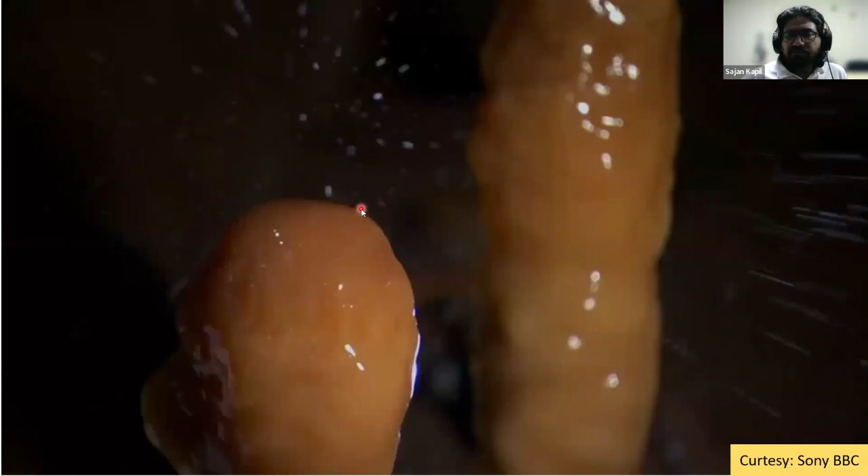You see this bird here... something is happening. Okay, so in this particular video you will see the advantage and disadvantage of this technology just in a single video.

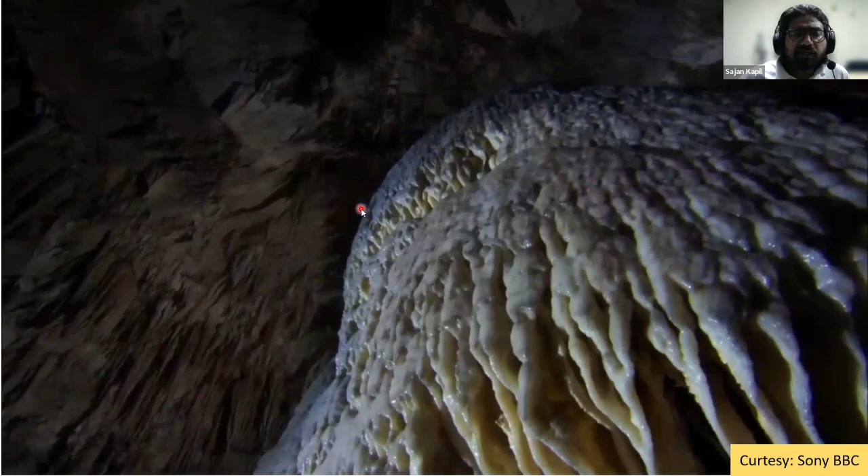These are limestone caves. If you've visited a cave—there are a few in Meghalaya as well, if you get time you should come and visit. These water drops, when they leave the roof of the cave, leave material behind, one on top of the roof and one on the bottom. These two materials keep growing, and finally they meet, creating column-like structures like you see here.

This was not done by cutting the material. These structures were not created by the flow of water cutting and creating it. No, they were created by additive manufacturing, by depositing layer by layer. And the growth rate of these columns is like just a few microns in a year.

Maybe it's slow, but can you really fabricate it by any other method? By cutting, can you do that? No, it's very difficult.

But of course it takes time. There are advantages and disadvantages, so we have to choose this technology wisely. I say this again, many times before as well - we should not just look at this technology, fall in love, and utilize it for something. That's not going to help. We have to choose it where it's really required, first understand the whole process, and then choose the appropriate one.

So, 3D printing - many names are there, right? Many keywords: 3D printing, layer manufacturing, additive manufacturing, solid freeform fabrication, digital manufacturing, rapid prototyping - all are the same. Each and every name is given for a particular reason. It's not like suddenly somebody came and said, let's call it digital manufacturing. No, there is a reason why it is called digital manufacturing, why it is called solid freeform fabrication, why it is called rapid prototyping, rapid tooling, rapid manufacturing.

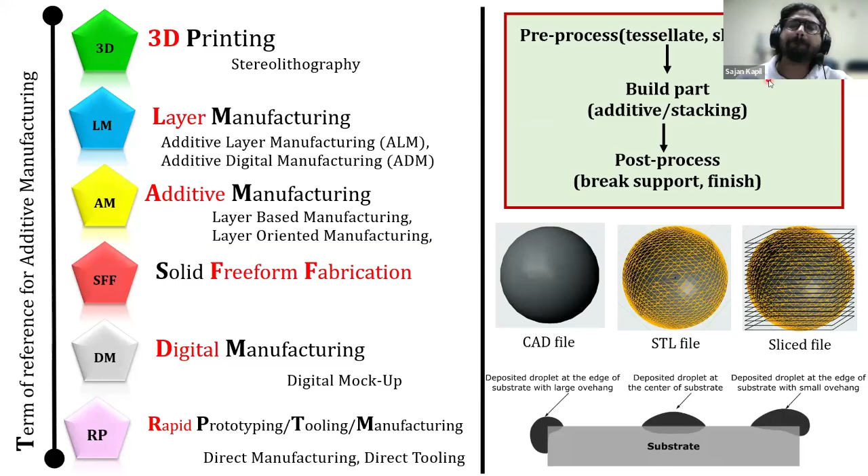What varies - there are multiple ways of doing it - is how to add the layer. Either I should join it by glue, or join it by melting, or some other way. So the interesting part is how to stack these layers together, and that is defined by ASTM by simply 7 methods. You can join these parts, and layers can be joined in 7 different ways.

Either they are photopolymerized, or you inject the material just like your 2D printer - that deposits drops of material on paper. Similarly, you keep doing it and grow in the Z direction. Or you are injecting binder - you know this technology where we spread a layer of powder, and then the binder falls from the top. Either the binder or the ink coming from top has a binding agent, or the material itself has a binding agent.

That's a different story - it's like you spread a layer of, say, cement, and then put a drop of water; wherever the water falls, it hardens. Material extrusion - yes, you can do material extrusion as well. Sheet lamination, in which you join sheets together. So material extrusion, that's the FDM process - of course concrete printing also falls into this category.

Sheet lamination you might not have seen, I believe, but I'll show you - we have one sheet lamination setup also now. We use metal sheets joined together by FSW, but of course you can join even papers together and create structures.

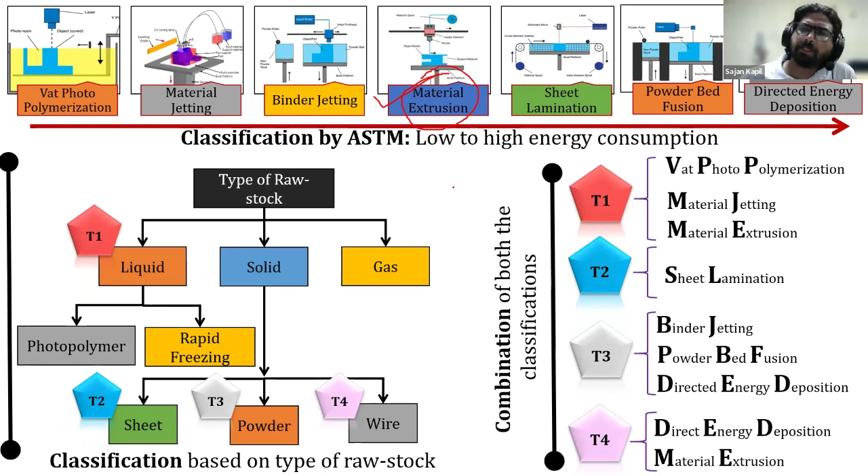And then CP Paul's might have talked about the laser-based DED system - his process falls under this category, and so on. I think you can now map it easily.

So under each of these categories there are more than 10 to 50 types nowadays. In total, we can name more than 50 different types of additive manufacturing processes, but they are nicely covered by ASTM. You can also classify them in a different manner, like what raw material is being used - liquid, solid, or gas.

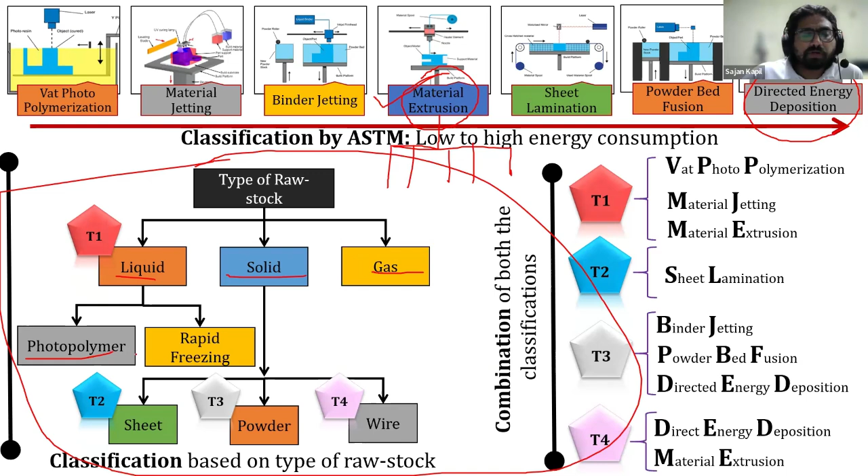If it is liquid, how do you join liquid? Either you photopolymerize it or freeze it, if it is wax or water. If it is solid, it could be sheet, powder, or wire. Or gas - I haven't seen anything where two gases come together and make a solid. No, that may be in the future, and you can think about it.

I tagged it like T1, T2, T3, and I'm categorizing it with ASTM here. You see that multiple categories are further falling into groups. So the point is, whatever you are developing, you should always map it with that. That helps you when writing papers, because nowadays many journals clearly say to bring the conventional, standard way of naming your additive manufacturing process.

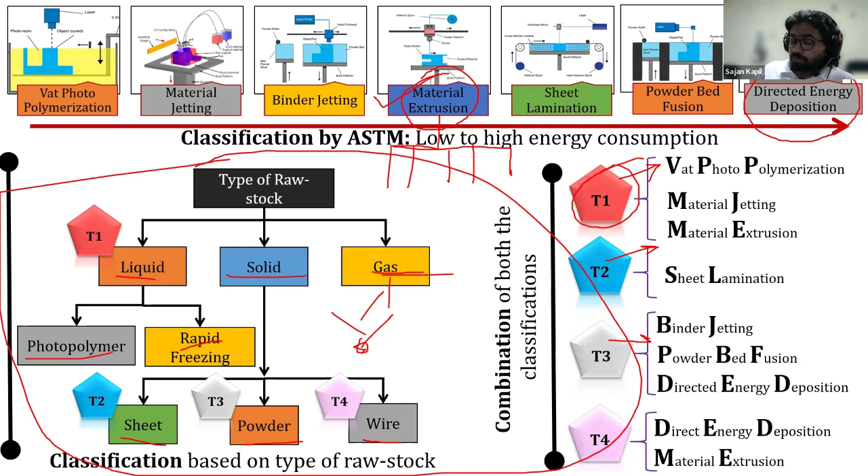FDM - many good journals do not really accept that term, because it's for a particular machine, while the technology should be called material extrusion, or more particularly, fused filament fabrication.

So these are the different types of 3D printing processes. This is vat photopolymerization. This is sintering, SLS, the powder bed fusion. Material extrusion, direct energy deposition using powder. This is wire arc additive manufacturing using welding guns.

So I'll talk about this particular one a bit. Though let me tell you, it's not at all new. Somebody says he invented this - not really, it's the oldest 3D printing process. See the patent, it was filed in 1920, where it is written that we are claiming a method of making decorative articles.

They say take a welding gun and keep depositing the material in your hand, and you will make decorative articles. They said decorative because they might have believed that at that time there wasn't enough strength, and the hand movement may not give perfect shapes. So it's okay, but the hand has been replaced by the robotic arm now, and the weldings are a bit more sophisticated. That's all. And of course you have software which can move this robotic arm in a particular path. That's it - otherwise this is not really a new technology.

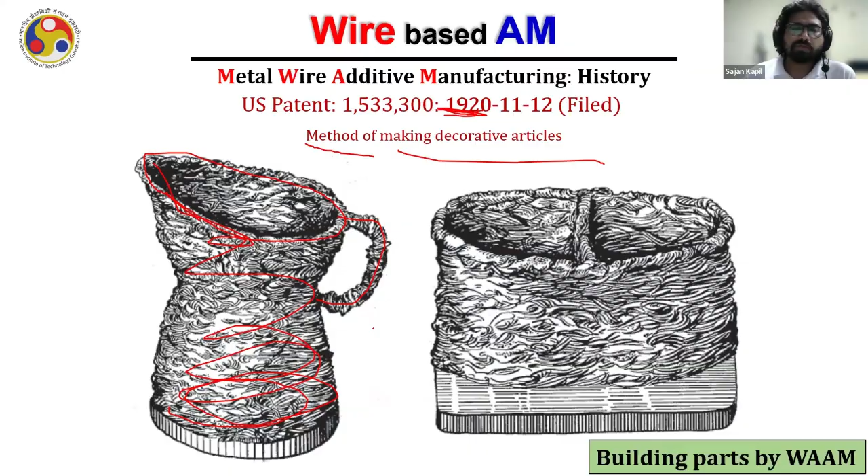But I'm going to talk about it. Before somebody questions - I know some of you may be metallurgists - I always believe this is an important question.

Who do you think is a material expert, I mean a 3D printing expert - how do we know? How can we say that this guy is a 3D printing researcher, or this guy's research area is additive manufacturing? You might have met many people, and if you see their background, either they have a PhD in finite element method and do simulation for DED or other processes, or their PhD is in material characterization, and then they do characterization for additive manufacturing also.

There are very few you will find who can talk about all seven processes independently - about the machine, how it works, about the software that goes into it - irrespective of being an expert in materials or an expert in something else. So they may have a doubt, of course, that what you are telling may not work. I mean, strength may not be good, roughness may not be good - many issues you can raise.

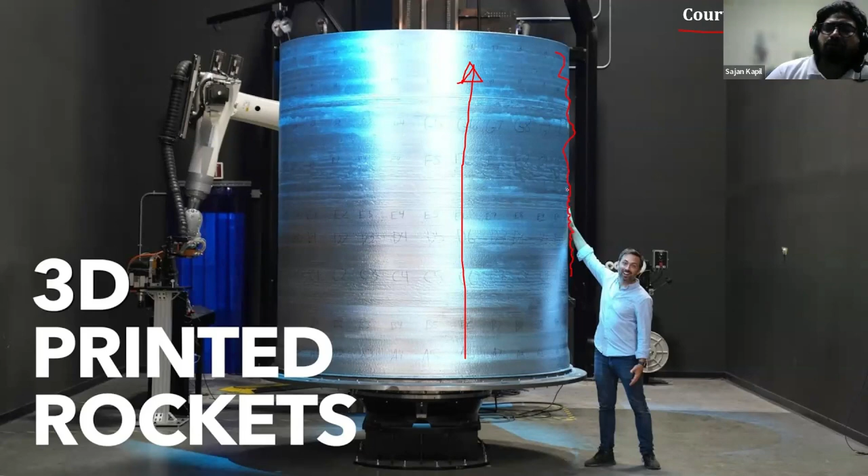The RA value - even these printers are not machined. They have bad surface roughness, I know, but they said it does not really affect the aerodynamics of it.

So how many types again? We have a very unique method of classifying additive manufacturing systems. You might have seen in some movies nowadays, right, when in a police station they put up a chart and connect different incidents or events? That's how we investigate different types.

Like material - if it is metal, material is flowing continuously, not drop by drop. If machine kinematics is serial, parallel, or hybrid - I'll show you what that means. Energy source is induction, arc, or energy beam. So we are focusing today on arc.

Dr. CP Paul might have talked about energy beam, and in that he might have talked about laser. But today I am going to talk about arc, and in arc I'll talk mainly about MIG and plasma in the end. I may not talk about TIG today, but these are the possibilities.

Whether you generate support or without support, if you don't have a mechanism for supporting overhanging features, you have to use multi-axis systems like CNC machines, 5-axis CNC machines, or robotic arms, so that you can tilt and build.

So any doubt, you may intervene in between and ask. That's what I like.

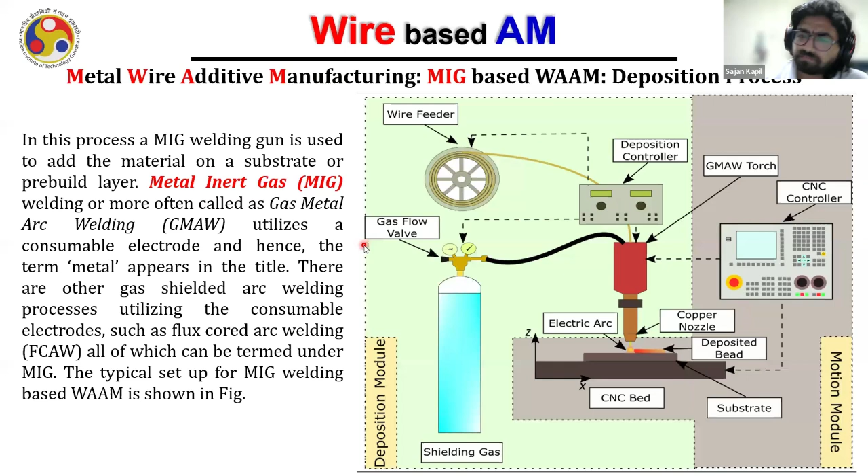So welding parameters you can use just to start with. But what should be the bead shape and size? I believe you know this, but let me revise your fundamentals of welding. If you have straight polarity in which the workpiece is positive, more electrons will bombard towards the workpiece, hence more heat will get generated on the workpiece. Hence you get more dilution, and the upper portion - the bead height - will be not much. So I don't want that much in additive manufacturing, because if it's beyond my previous layer thickness, it will distort it and collapse the part. Lot of heat is not required - more heat, more issues. We want optimal heat.

Or you can do negative polarity - if workpiece is negative, that means more heat will be bombarded onto the wire, hence deposition rate will increase, but it will not get much chance to penetrate. In that case, less dilution, but then sometimes fusion issues come and strength becomes very low in the z direction. And sometimes they use AC, 50% up, 50% down - both are fine.

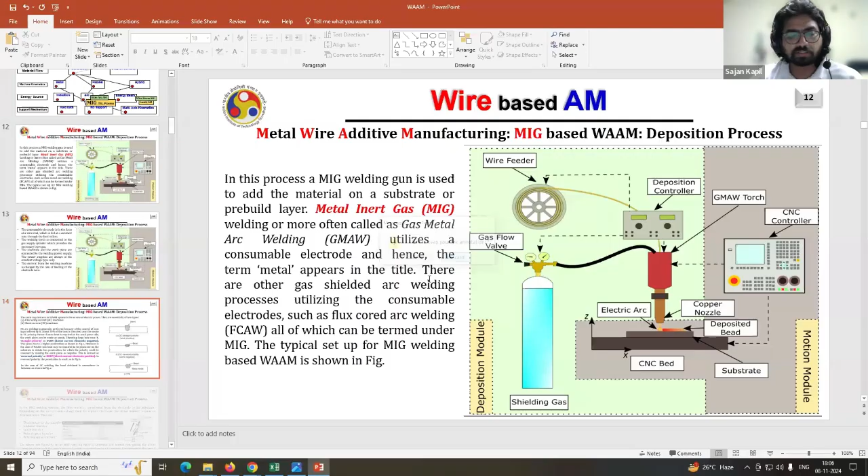Now let me ask you a question, I'll show you and explain this. Look at me - if I have two hands, and in one case I'm holding them like this, with quite a distance overlapping, a fairly good amount overlapping, strength will be good, right? If I pull my hands up and down now, it will require a lot of force, right? But if only the tips of the fingers are in contact, then less force is required, right?

So now you know why, if I print the part with very low heat input or very low dilution, then grip is low. Not much dilution into the part, not much growth - only a very small portion got fused. If I overlap a lot, of course it's good, but then there are issues with the pre-built layer getting damaged. So that's why you know now that the strength is also bad in that case.

Yes, you can ask - Kailasan, right? Can you pronounce your name also?

Somebody raise the hand. Can somebody unmute him? Kailasanathan sir, you can ask question. Yeah, but he has to unmute. Yes, I will actually. Yeah, he can unmute browser actually. Oh, he can. Then maybe by mistake he is raising a hand. Or you can type here if you are unable to.

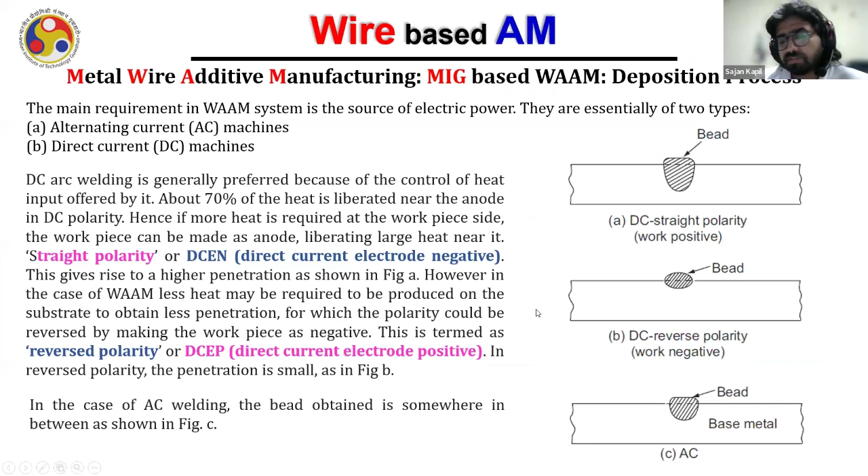So that's why in additive manufacturing it is preferred to have AC. 50-50 is fine. But then, how do I transfer material? Is it like what I do in welding will work here? There are multiple ways.

First is called short circuiting. In short circuiting, the wire in solid form touches the substrate and the short circuit happens. Then the machine came to know that there is a short circuit, so it increases the current. As the current increases, by I square R, more heat gets generated and it breaks the wire. It detaches, the wire comes further, and again does the short circuiting. This is called short circuit transfer. Why does short circuit happen? Because there is not enough current that the wire gets melted before touching the substrate. It touches the substrate in the solid form itself.

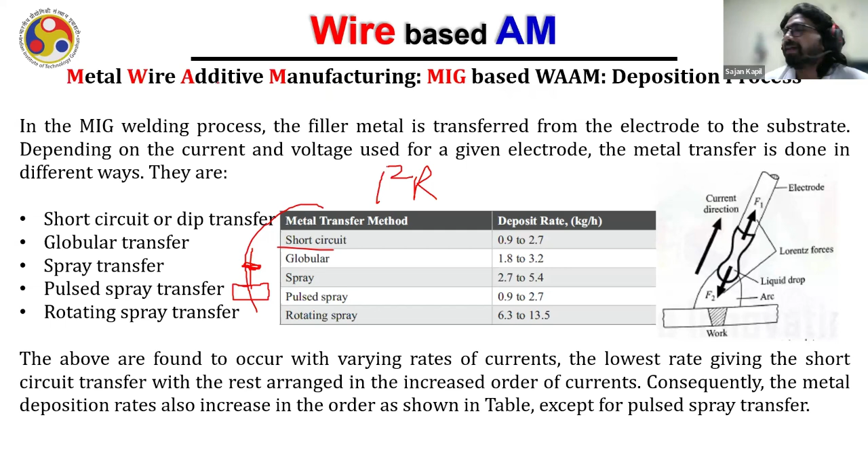Correct, right? Or you can do globular transfer, in which there is enough current that it makes a big bubble of molten metal, and then it falls as a big drop. Or it can be spray transfer. In spray transfer, the metal falls onto the substrate like a spray, or pulse spray, or rotating spray.

Let me show you. Yeah, somebody is asking something. Okay, maybe by mistake. So you see this.

All of them are summarized here. Thanks to this channel, this is a very good channel, they just nailed it, shown all of this. I just put them together, and you can see this is the short circuit.

You see that the wire is touching the substrate, and you see the lights off. The lights off means arc off, right? And arc off means short circuit. Then the machine came to know it and immediately increased the current, so that there was a lot of heat here, and then it breaks the wire - that's short circuiting. Globular transfer: you see that wire feed is very low in this case. Wire is getting melted and accumulated here, and a big drop then falls. Or spray: the current is too high, so the wire is getting melted here itself and coming out. Or a pulsed one - this is interesting.

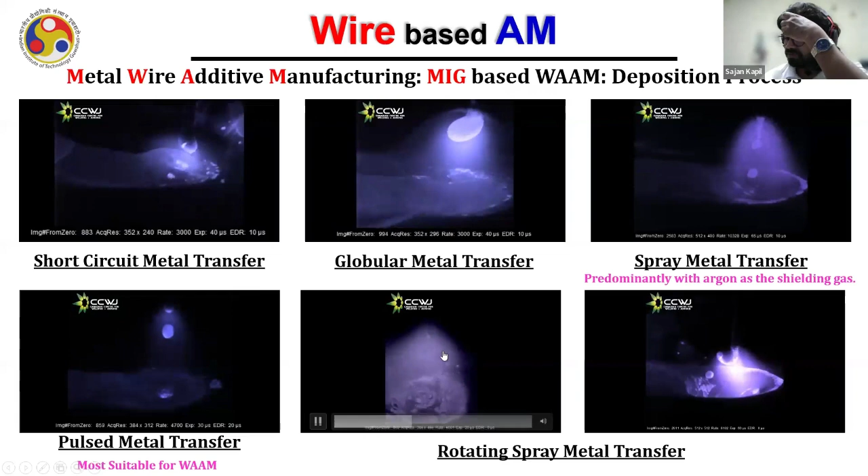So what I want is something in between. Pulse really works - you give high current only to detach one drop. If current is further increased, due to multiple forces like Lorentz force, and because a magnetic field gets generated here, you see that it keeps on rotating also. That's very bad for additive manufacturing - we don't want that at all. So preferably, we don't want this, we don't want this, we don't want this much, and this also not really. We want this - this is fine, this is also fine. These two are okay.

But then can we say CMT, these two? One minute sir, yeah yeah yeah.

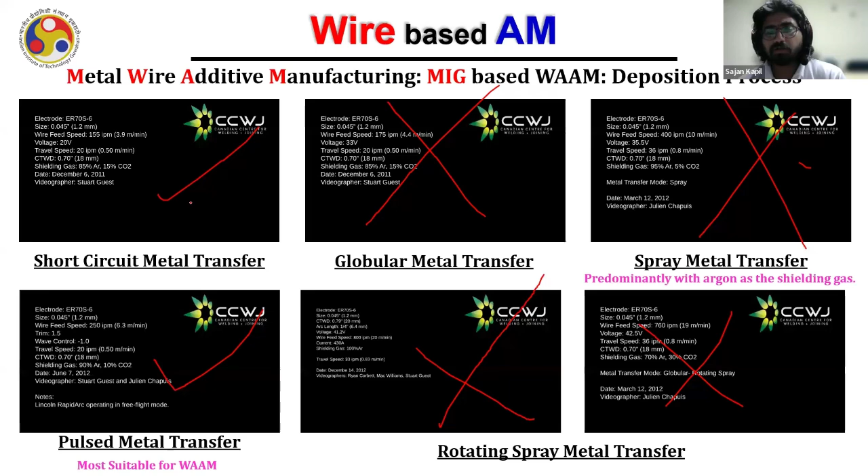Can we say these two are the drop on demand method? No, no, not at all. Drop on demand is completely different. You want to learn about drop on demand? I'll explain today - drop on demand is more like CMT. I'll explain CMT now. Good question.

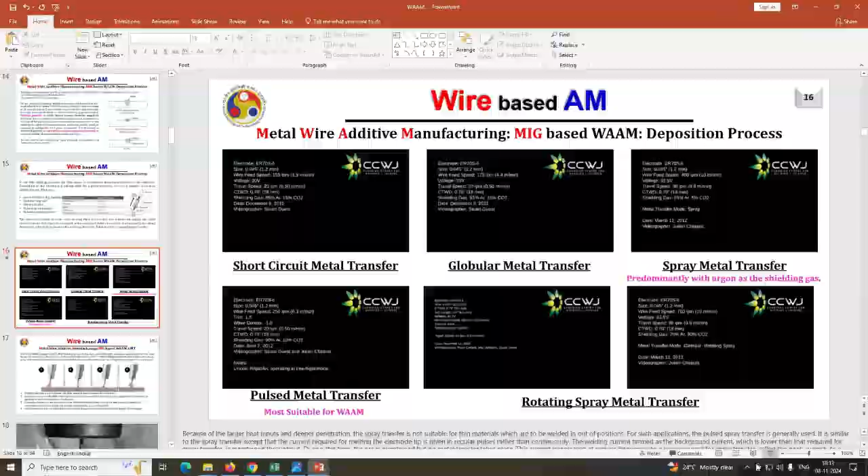Then CMT came into picture by Fronius, and they said, okay, you want less heat, na? We'll provide even less.

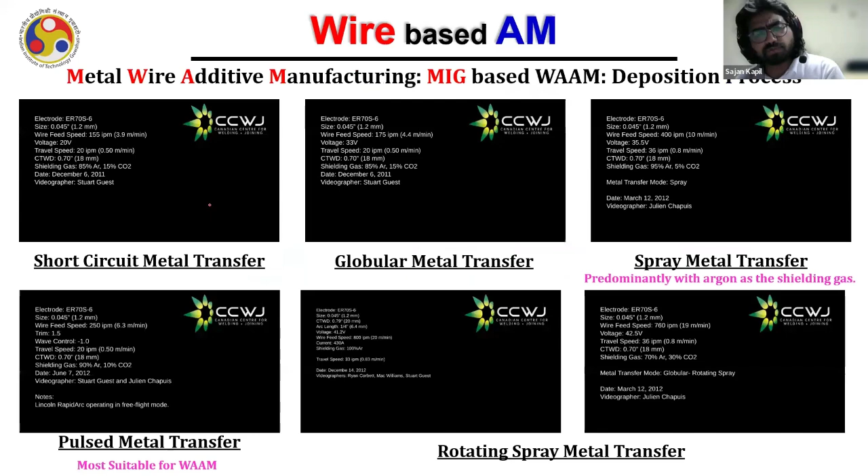Where is the extra heat going in the short circuit case? They said, okay, we will even reduce the heat then the short circuit. When the wire touches the melt pool, in the short circuit case, they increase the current, correct, to break it. So they said, why increase the current to break it?

Instead, I'll pull the wire mechanically. So here, the wire is going forward, touching the substrate, short circuit happens. As soon as the short circuit happens, the surface tension between the melt pool created onto the substrate and the drop generated at the tip is high, and they get better adhesion and it sticks here.

And you pull the wire back. Of course, if you pull the wire back very fast, what will happen? It will leave the drop behind. And to do this, earlier what we were doing was increasing the current, correct? Then only it was breaking here, generating more heat.

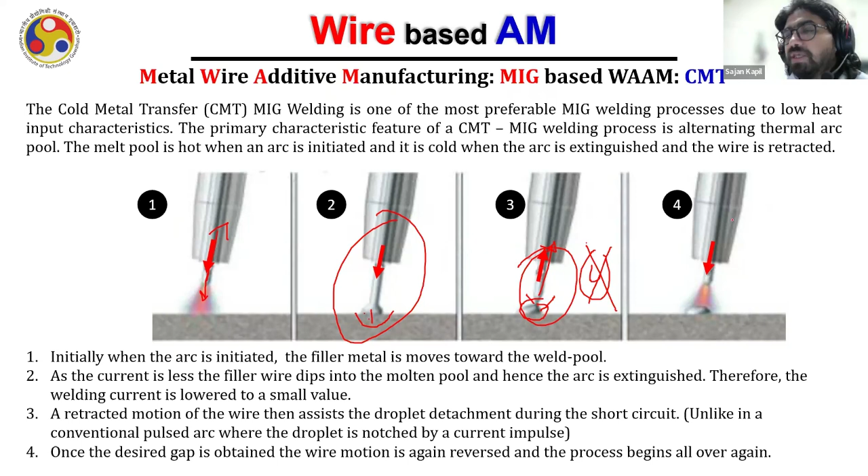So we eliminated that extra current needed to break the wire. Why use extra current to break it? Instead, pull it back mechanically. Of course they don't do it by hand. They keep vibrating the wire, and it is in synchronization with the current supplied by the power source. A very sophisticated system, and hence it got very, very popular.

They call it cold metal transfer. Cold metal transfer is not a generic name. This method was developed by an Austrian company, Fronius, and now also by Japan. There are a few companies that supply it. It got so popular that even in papers you can read this term, but it's a commercial term patented by Fronius.

CMT, cold metal transfer, even I am writing it here. But the technique is now being adopted by many because the patent is no longer valid, I believe. Then Japanese and other companies adopted similar technology. This became very popular for additive manufacturing.

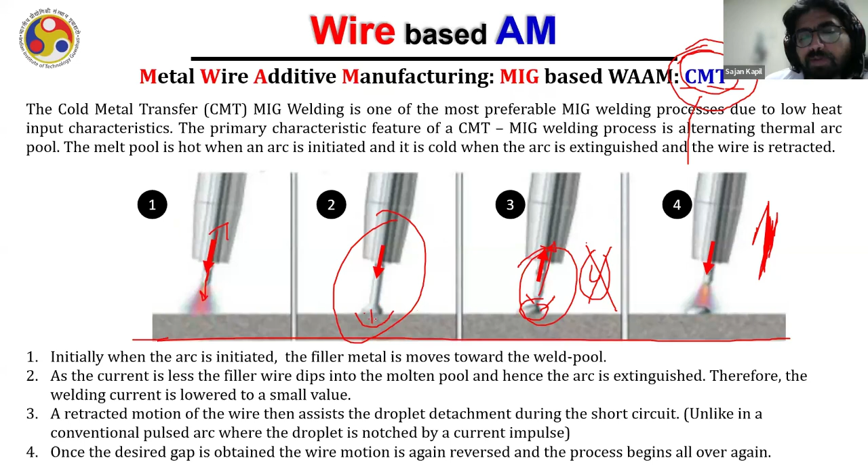This is best. That's what we want. We want the substrate to remain cool while keep depositing material. Hence today everybody uses CMT.

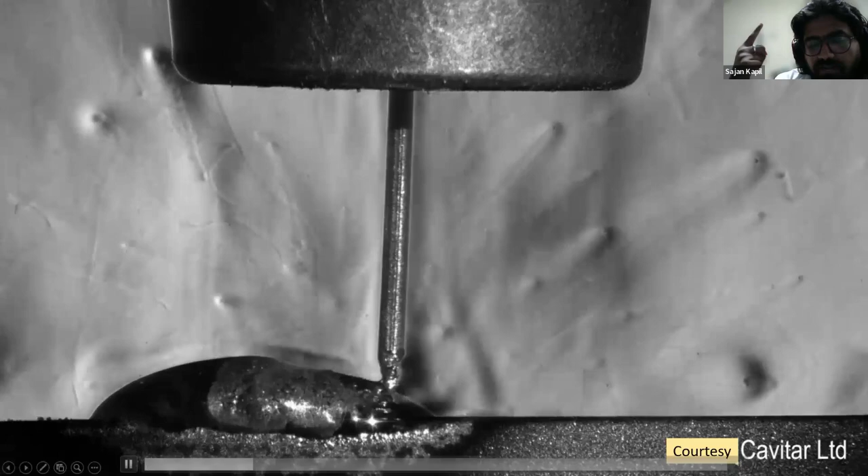This is how it works. You can see this slow motion video. Touches, pulls back, you see that? It looks like somebody pulled it. That tiny amount generated at the tip just got pulled back. But here the drops are at a micro level, tiny drops getting generated at the tip, and you are dropping them.

Of course, it can also be called drop on demand, like someone just asked. But this is not drop on demand. I'll let you know what drop on demand means in additive manufacturing.

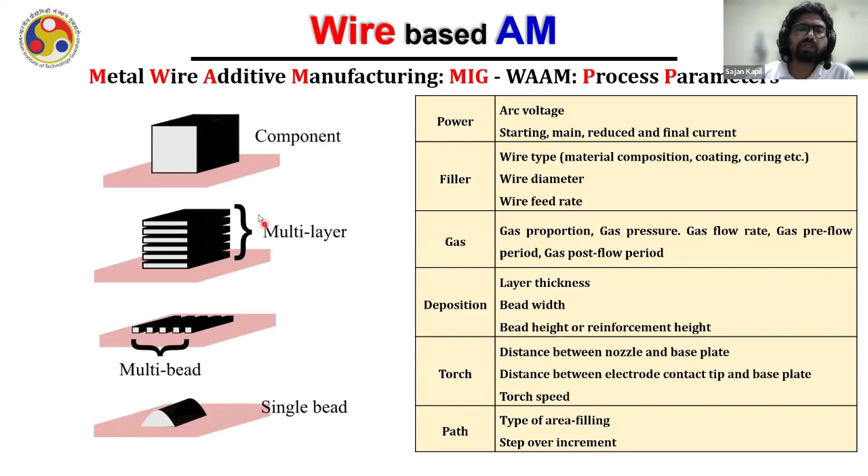And then, if you are new to this technology, this is the step you should follow. First, you should do single bead experiments, see what is the width, what is the height. Then do multi bead experiments, depositing the next bead adjacent, then multi layer experiments, and then you build the component, doing characterization in between as well.

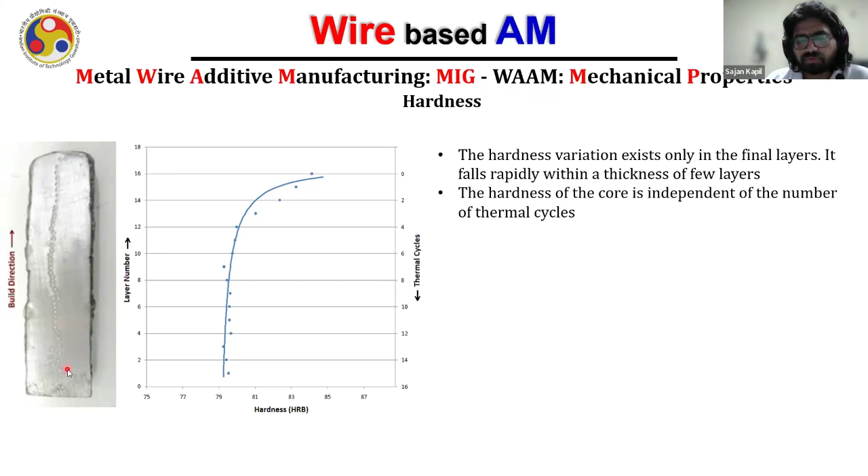This is a typical trend of hardness in parts created by WAAM. The hardness is high on top because fewer thermal cycles have happened there, but at the bottom a lot of thermal cycling has happened, heating, cooling, heating, cooling many times. So the grains become coarser and merge with neighboring grains.

Strength wise, traditionally, the strength in the Z direction, the build direction, is low, while the strength in the other two directions is fairly good. They are good, but in the build direction, not really.

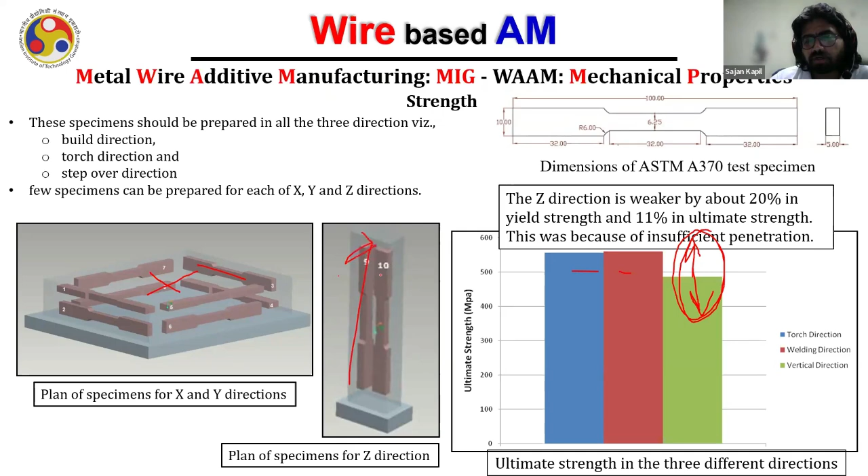But as I said, if you increase the current, the strength also increases. And you know the reason, I already explained the heat affected zone region. You grab it more. That's just how you can imagine it.

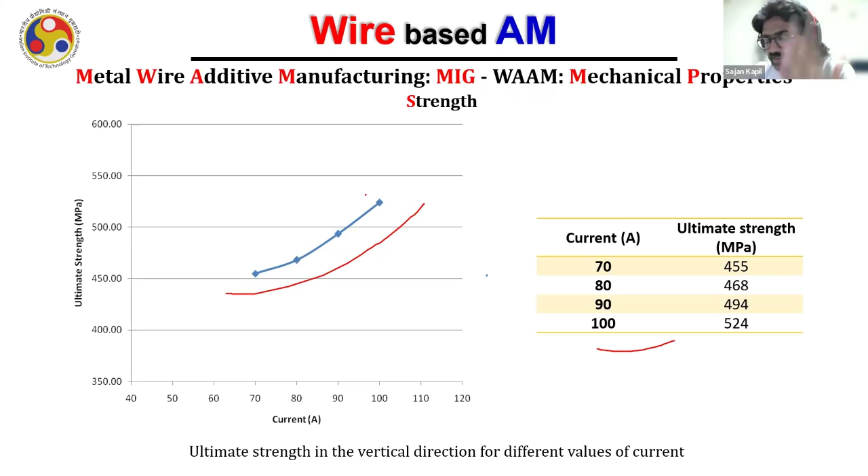But now let me tell you some defects. The first important defect is residual stress. What is residual stress and how is it generated? Let me explain that.

When you heat, for example, you are creating a melt pool. It gets heated, hence it converts to liquid. As it gets converted to liquid, it compresses the nearby area because volume is increasing. It compresses and pushes the nearby area. Hence the stress is compressive in nature.

Then after that you cool it. When it gets cooled, at this interface, it is going to get solidified, right? It will pull this region. As it pulls, in the end there will be stress remaining there. That is called residual stress, which remains in the part.

Now what could be the issue? There is stress, so what? But if that stress is tensile in nature, imagine if this bottle breaks at, let's say, 100 force, I have to apply 100 amount of force to break it. But if there is residual stress inside of 60 amount, that means only 40 is required to break it, because 60 was already there.

That's why forged parts are better, because in forged parts you hammer it. It has a lot of compressive residual stress. Hence, if I try to pull it, or if there is a crack, it will not try to open it; the nearby material will try to even close it. So it's dangerous if the stress is of tensile nature in the parts. Compressive is fine, we like compressive residual stress.

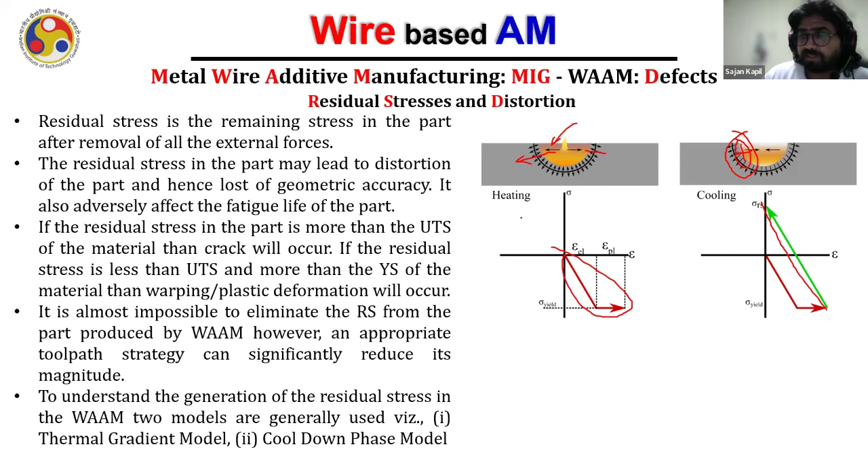But if the residual stress in the part is more than yield strength when you remove it from the job, what will happen? Or let's talk about less than yield strength - if it is less than yield strength of the material, nothing will happen. You can't see it by naked eye. It looks good, but like I said, when you break it, fatigue will occur, or crack growth will be very fast. So you can't see that residual stress. For that you need to use XRD and other such methods.

But when you break it, it will break very easily. So if the stress is more than yield strength, it goes into the plastic zone, meaning when you untighten it from your fixture, or take it in hand, it got warped - meaning the stress got converted to deformation. And if that stress is more than the ultimate tensile strength, you will even see a crack, it will break. So residual stresses are not good for us.

The second defect is porosity. Porosity can be of different types. It could be raw material induced porosity - maybe your raw material is greasy, not nice, there are multiple hydrocarbons in it, contamination in the raw material itself. Or it can be process induced, due to poor path planning.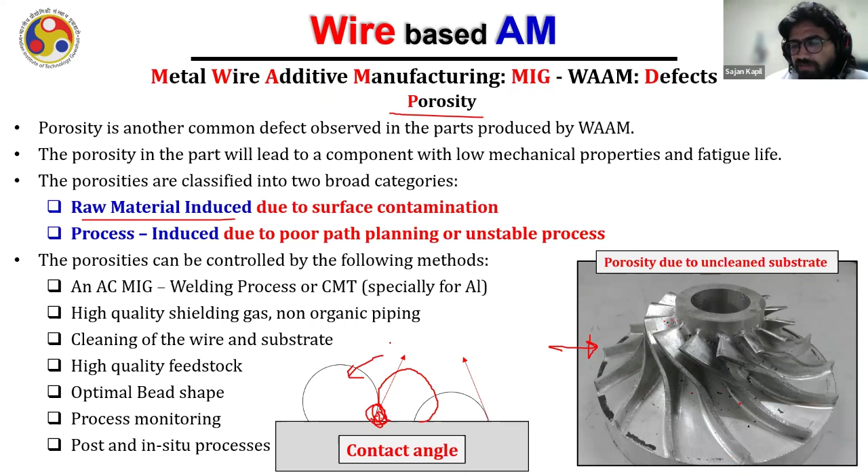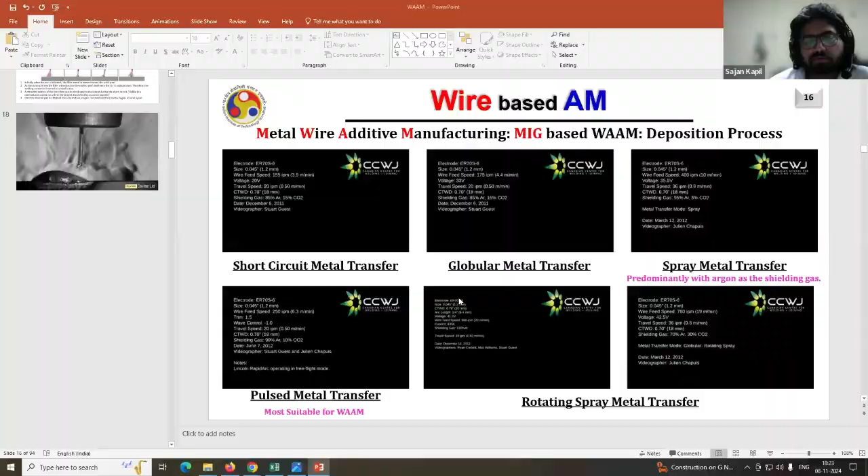Yeah, did somebody mistakenly input that? Oh, interesting.

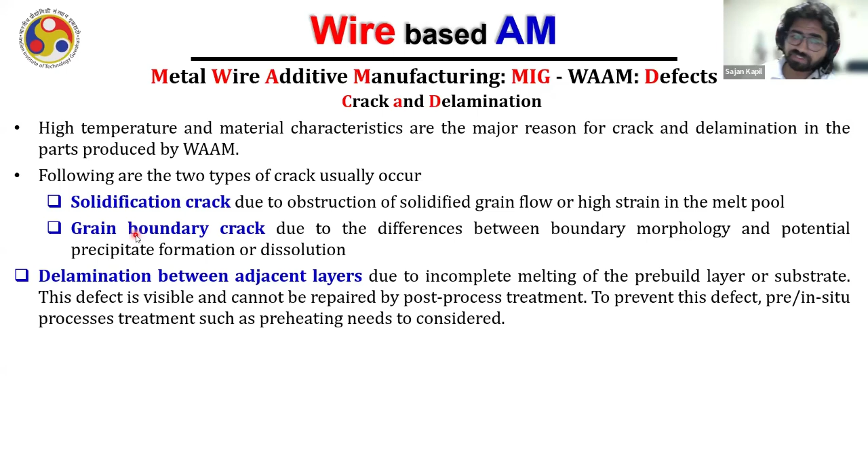So quickly I'll show you. Other issues, like solidification crack or grain boundary crack, delamination between layers due to lack of fusion. Different materials have different issues.

Even titanium has no stress issues at all. But materials like Inconel and these steels have pretty good stress issues. Oxidation in titanium, you know that - it's on top. Titanium is very reactive, you have to do it either in a controlled chamber or controlled environment.

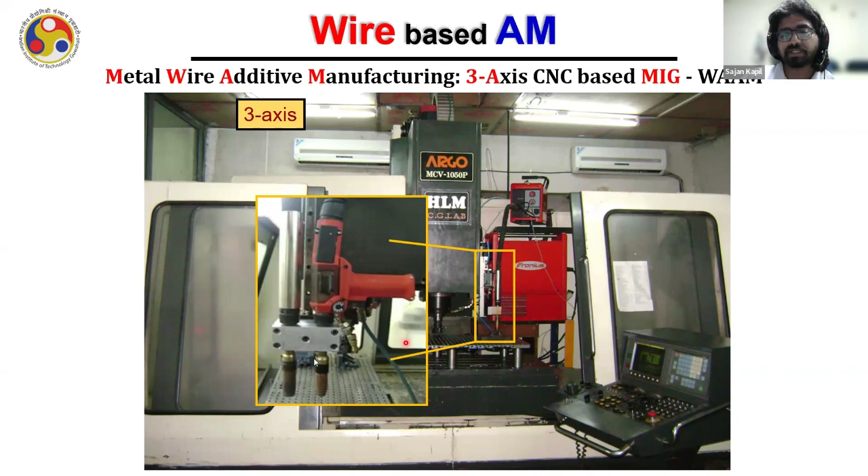This was my first machine in IIT Bombay. I retrofitted a 3-axis CNC machine with welding guns - of course not by me only, somebody was also working on it previously. Then two welding guns were also mounted together so we can deposit multi materials, one by this, one by this. We made a die out of that. That's how it works - the hybrid process.

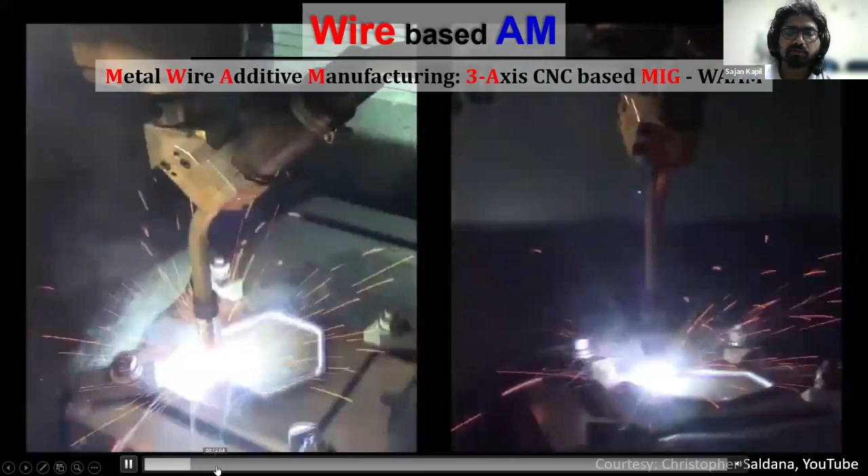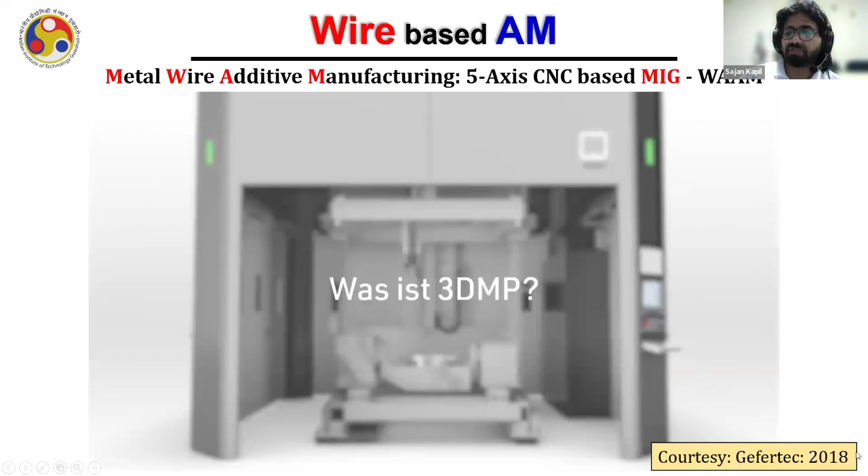I mean deposition and machining together - depositing, and after that machining as per the requirement. Cool. Of course, after that, in 2018... I did that in 2015, oh sorry, 2013, they came.

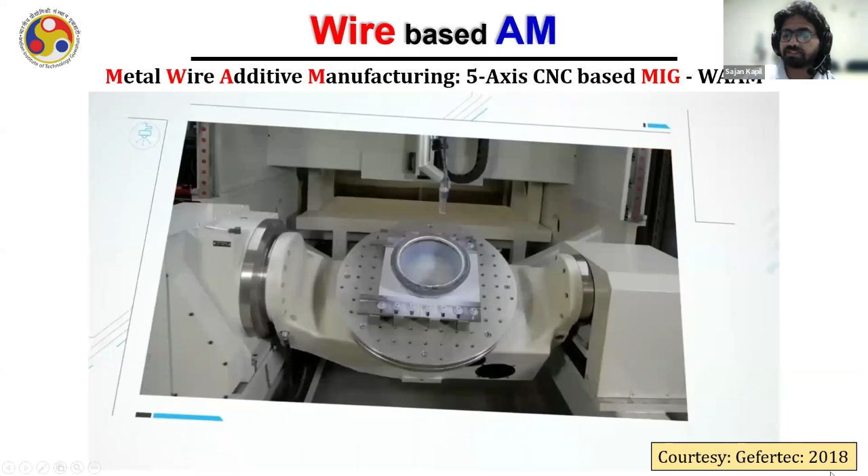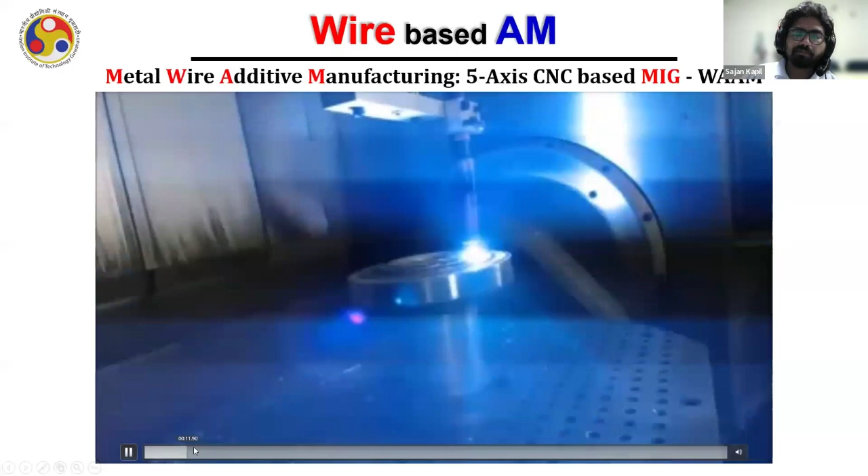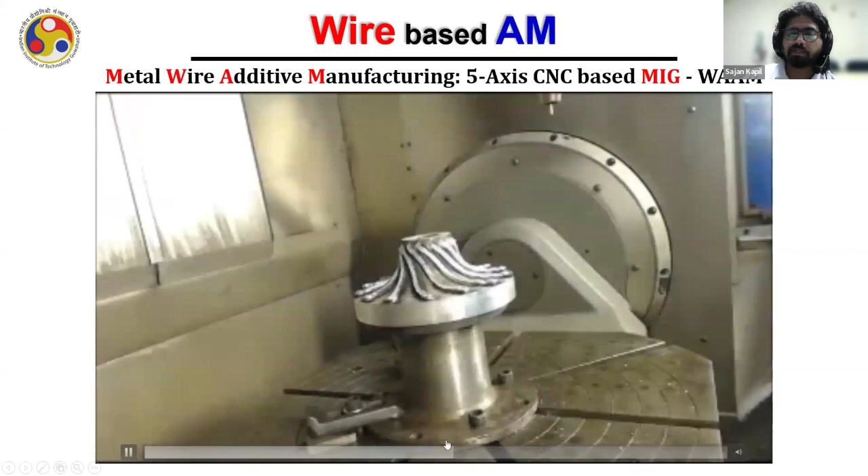Gefertec came - they are the commercialized machine supplier, machine builders, basically based in Germany. But of course I made a similar machine in 2013 like I mentioned. This was a video, you can see that aluminium impeller getting built in 2013 - now more than 10 years. So it's depositing the hub and then depositing blades, and then we'll machine it later on.

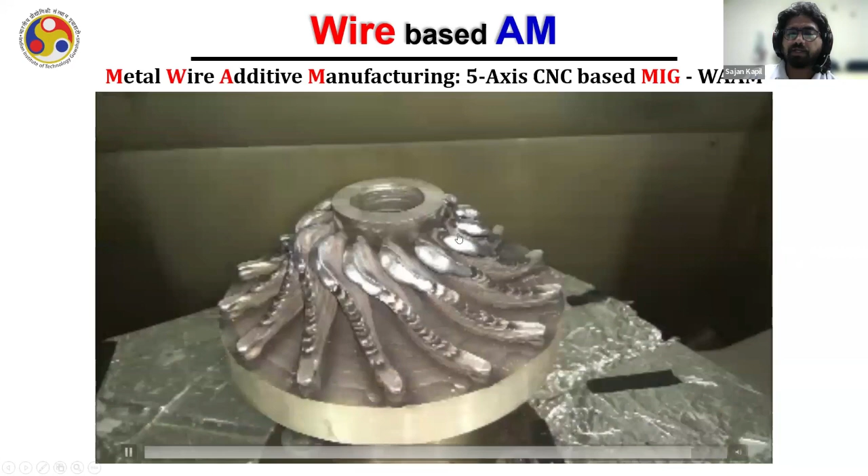You see, final near net shape - now it will get machined to get the final shape. Correct.

Then nowadays I am more focused on robots, and I got motivated for using robotic MIG welding from Cranfield - they are the first, basically. They have a company, they have WAAM3D - Wire Arc Additive Manufacturing was the name given by this group, Professor Stewart Williams, and this guy standing behind is Filomeno, who is CEO of that company, WAAM3D.

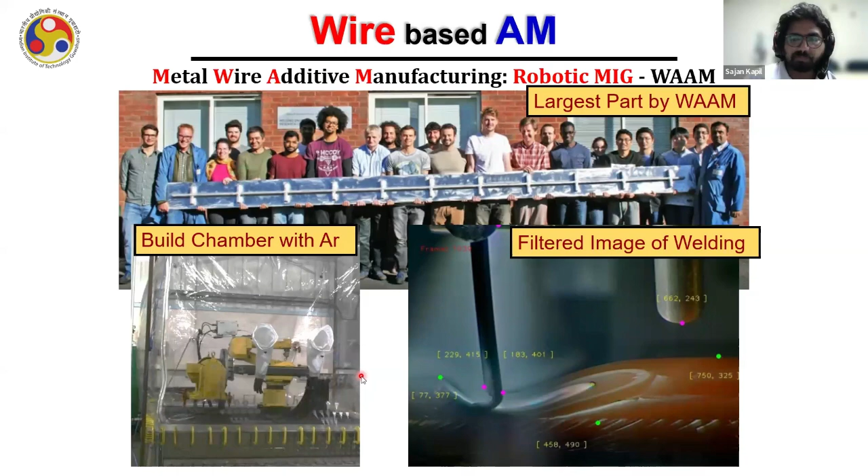They were almost the first in the world to make parts at commercial level, I mean the real good big parts, even titanium. You see the build chamber - they purge argon inside the whole tank kind of thing, and then build. They monitor - you see how nice cameras they have, it's very expensive but good. They can monitor each and everything: wire, melt pool, temperature gradient. They don't allow deviation, because that's how you control microstructure.

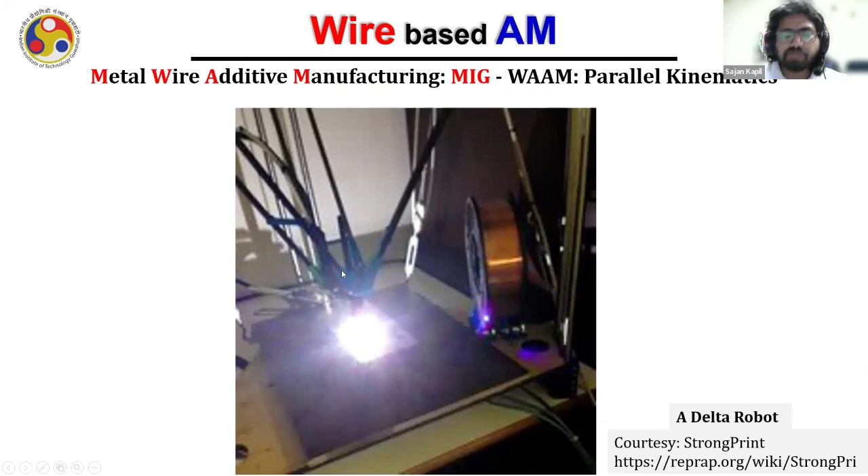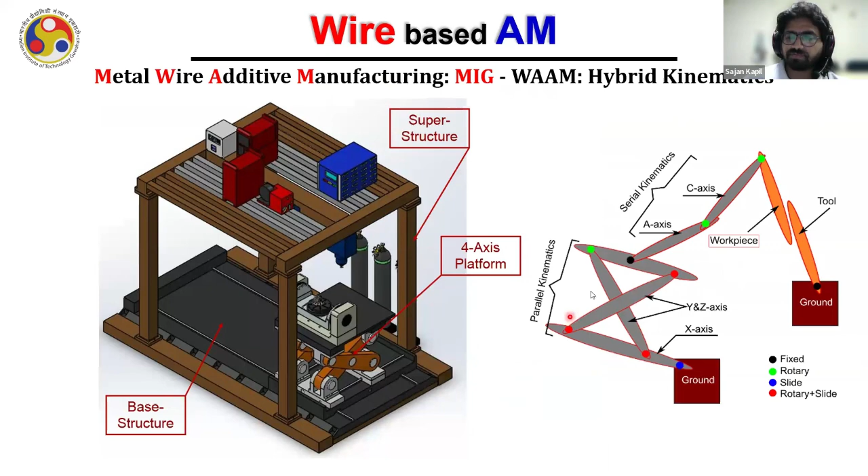Or you can use parallel kinematics, like this Stewart platform, inverted Stewart platform kind of thing. I also tried this - this was my PhD work. This is a scissor lift with serial kinematics on top, parallel on bottom - hybrid kinematics.

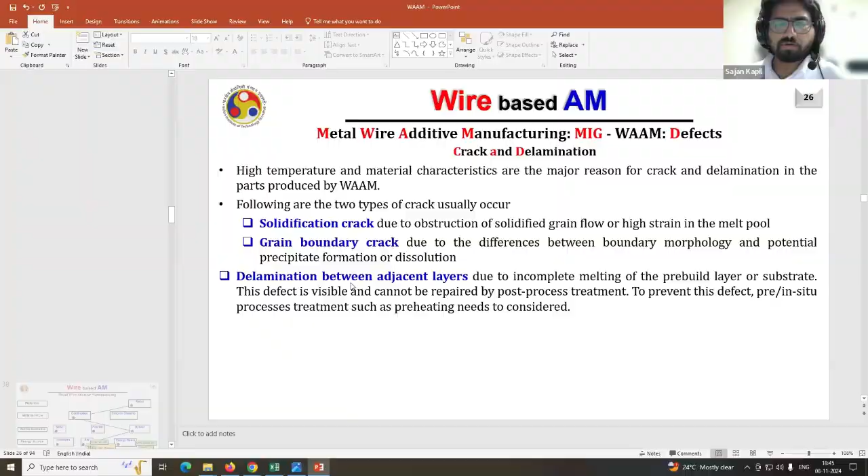So that's it, I think I'll just quickly mention about my lab. Let me open another presentation for that - I think this should be sufficient.

I do training programs, a lot of them, and I particularly give individuals one 3D printer so that they can learn from zero. Indigenously, I develop CNC based WAAM systems, robotic WAAM systems, and their CAD CAM systems.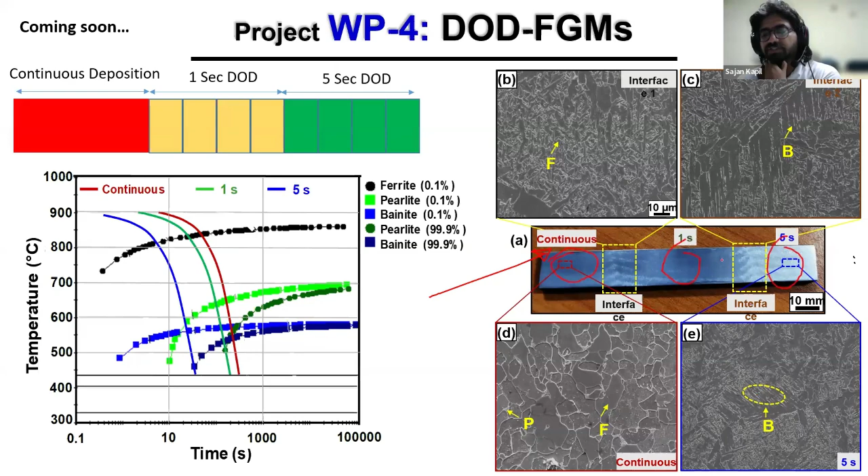I can control structure. Somebody asked me, can I control it? Yes, we can control. I have different microstructures here, different microstructures here, and different microstructures here - all in the same sample, with no post processing. We control it while depositing. Not only that, we can have different density.

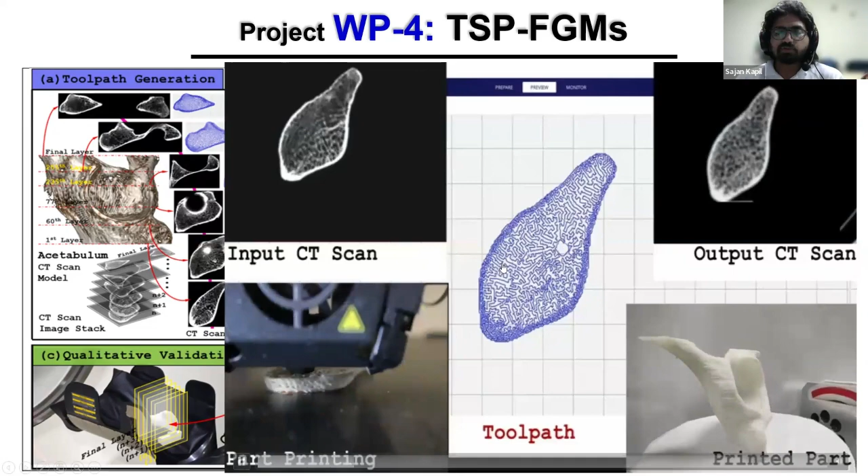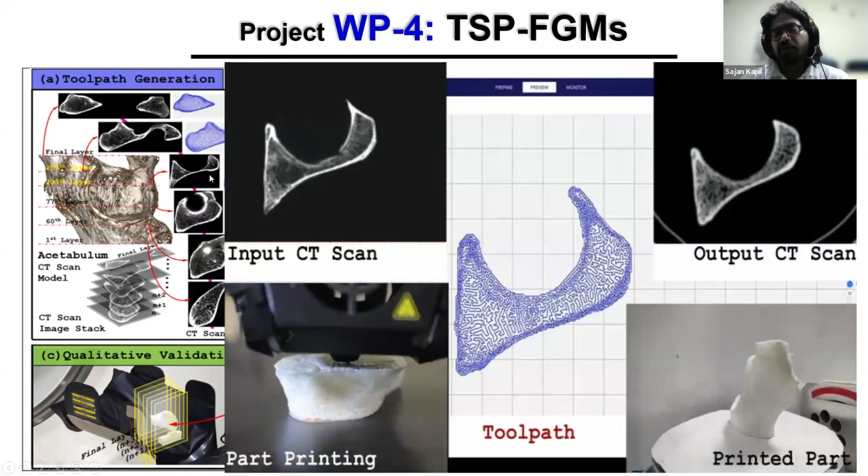This paper is published in CAD. I can control my porosity with the same tool path, and this tool path is again a single line. So we printed a bone and did a reverse CT scan of it. After printing, it exactly matches the original CT scan. So no need to impose porosities artificially - those are engineered. We just replicated the exact porosities. I can even print parts - you see the exact same parts, same size, same shape.

One is 590 grams, another is 475 grams. You can think about how we reduce weight out of it while they have exactly the same shape.

Here are some functionally graded materials. Again, the bottom is material one, another material on top. We even see cracks sometimes, yes, when there are issues. We are working on depositing and finalizing how to transition - should I transition suddenly like here, or should I transition slowly? So that study is ongoing.

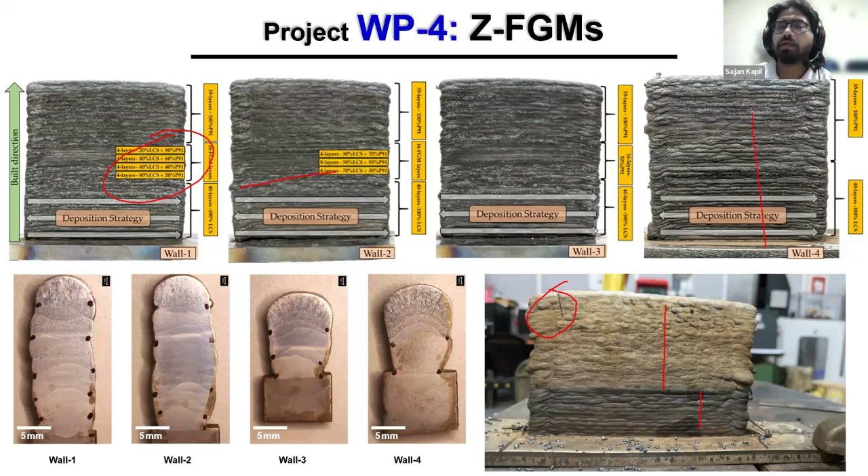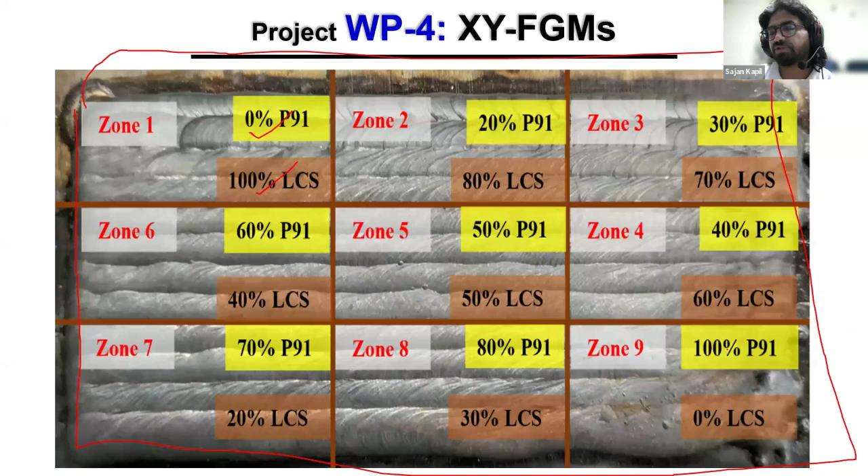That's Z direction FGM. Or not only that, we can even deposit on a plane. This is a rectangle, and in that rectangle I'll define that I need 0% here, 100% mild steel, and in this zone I need 100% P91, 0% mild steel. In between, you tell me how to vary, and I'll vary it.

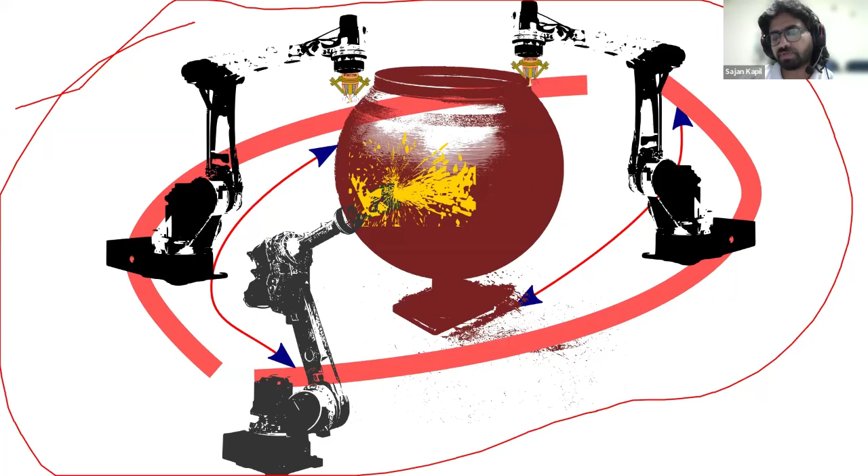So we sketched this first idea of our plasma system. This is not just in India - nowhere in the world will you see such a system. We did a lot of trials and then finalized it. Of course, we made a lot of small machines too - this kind of 3D printing machine you will see soon from our lab, particularly for FDM.

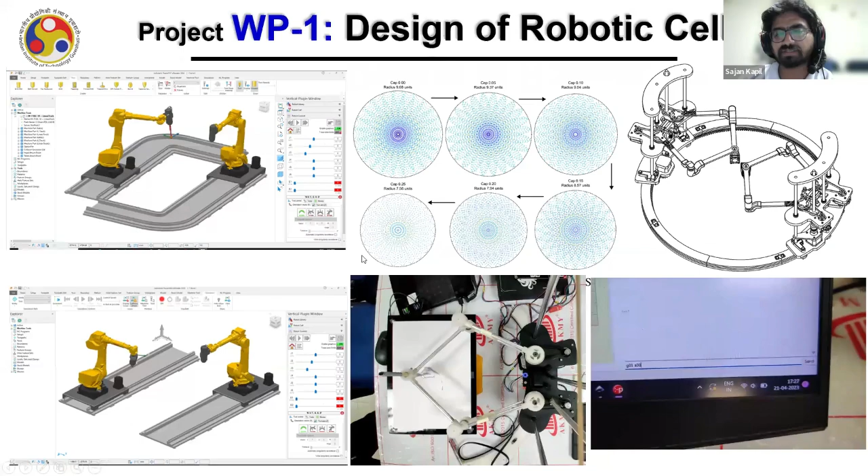We are making it very cheap now. These machines are not expensive, and very fast - much, much faster than your existing FDM machines. And then this is the facility for plasma. We have multiple facilities, even lasers, blue laser as well, but this one is particularly for plasma.

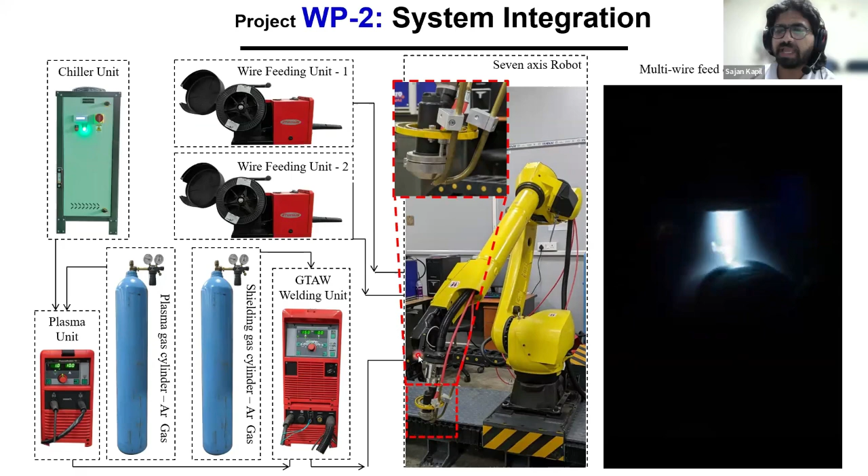With plasma, on both sides, each wire, each plasma - you can feed two wires. You can see this video: this is the plasma, and there are two wires going into it. You see the left wire, right wire - this is P91, this is mild steel, and they're getting deposited, depositing the bead. I can feed wire at any feed rate, at any location, whatever is required.

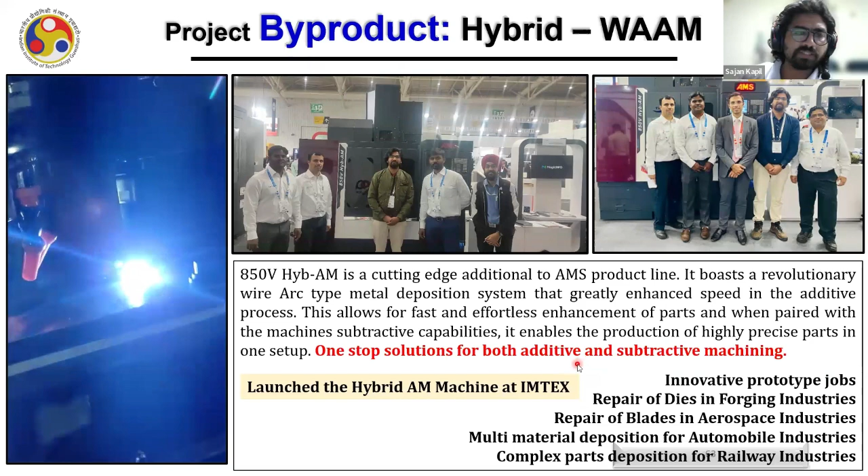We just don't work in labs - we build machines, or help our industrial partners build machines. This is one of the success stories. This machine was launched at Imtex two years ago. A very good friend, Vishwas from AMS, launched this machine, and they are my industrial partners. Of course, we also have our own software now, with help from ModuleWorks, which can plan the entire machine process - we can put it inside a virtual environment and plan its path and everything.

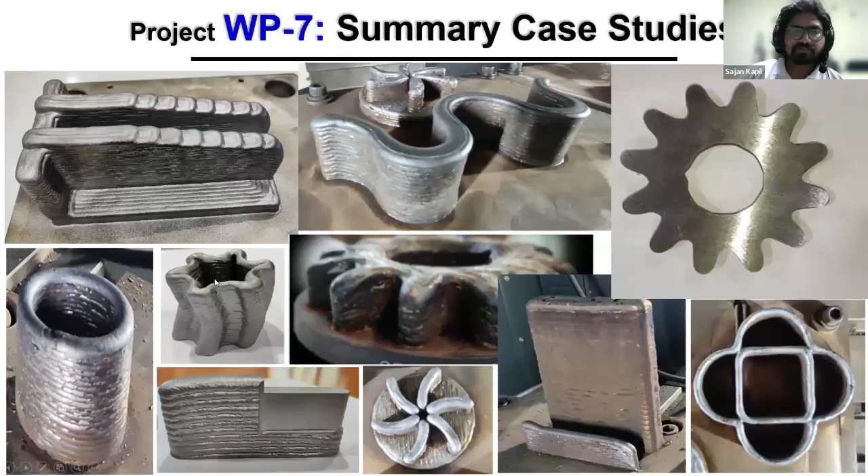Some case studies you can see - maybe I'll show you the most recent one, not necessarily the best, all are good. Whenever somebody comes to our lab, we don't have anything to show. You know why? Because we don't keep parts for ourselves - we make a part and then it's gone.

It's currently in New Zealand, I believe. This is a part we built for a New Zealand company, made of aluminium. We built it and saved around 60% material. We deposit, then machine, and then give it to them. It's quite a large part.

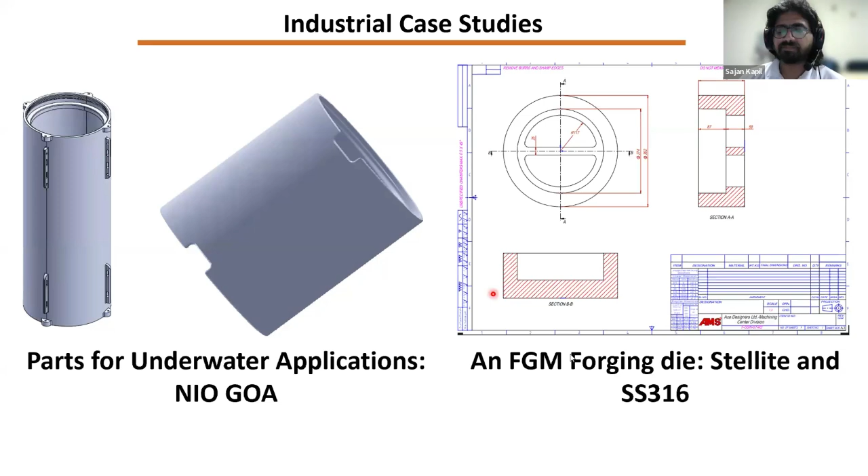These parts will go underwater soon, by January. We are building some parts for NIO Goa with multiple materials - different materials in different zones. This is a part for a forging die made of stellite and stainless steel. We are working on it.

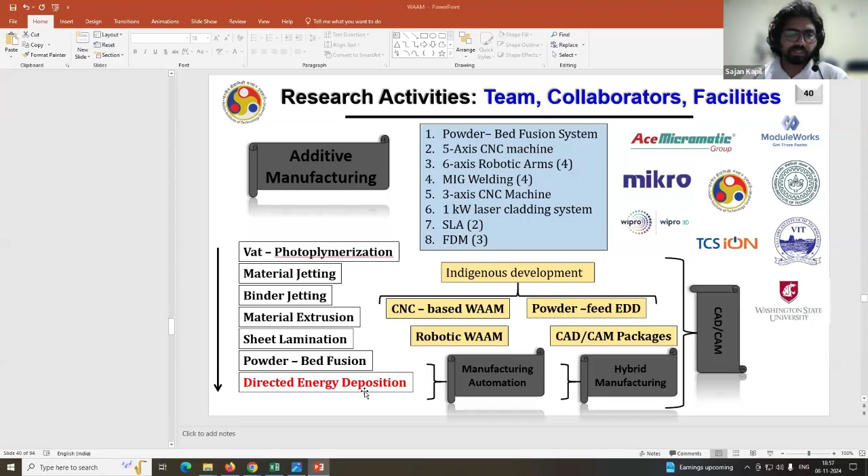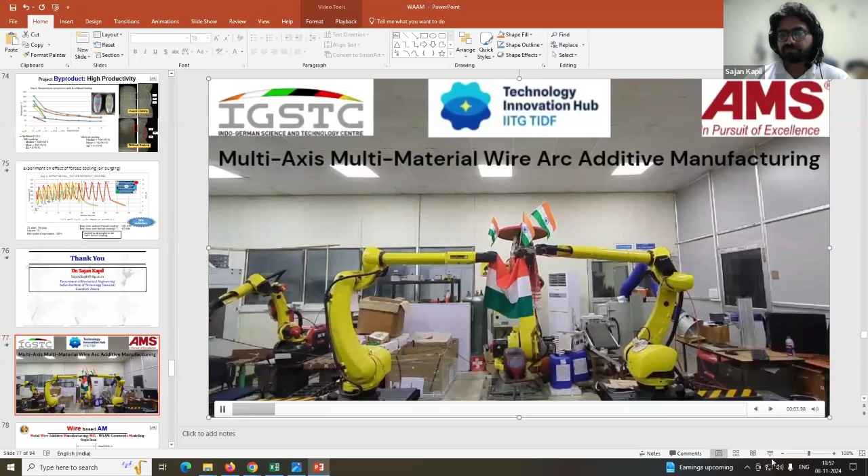We do many other metal processes, but I don't think I have time to discuss that. Instead, I will take some questions. This is a good video, but I'll skip it - let's see it. Maybe on LinkedIn you can see the dancing robots.

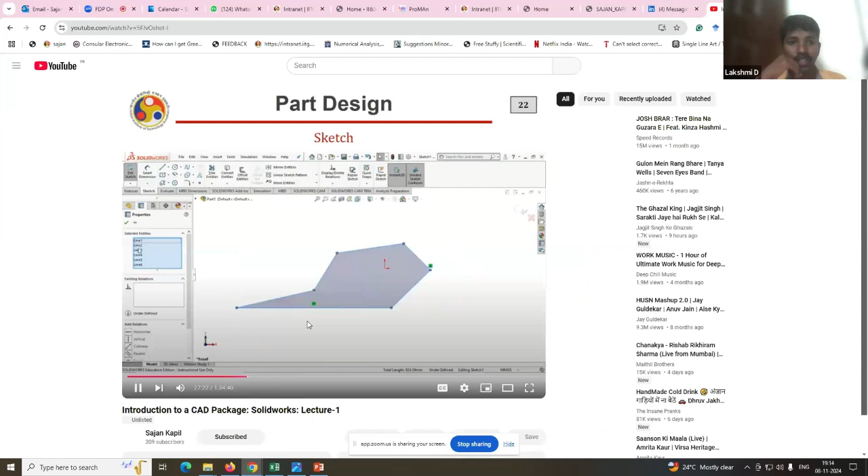So for the practical side, I do courses. Let me show you. This is full of resources. Look at this website. For example, if somebody wants to learn CAD CAM, SolidWorks, there are 4 lectures on YouTube. You won't find them without clicking here because they're hidden. They're very detailed, though quite old now, I built them during COVID. They can learn SolidWorks in just 4 lectures.

And if somebody wants to learn math, I teach maths, so that is here too. All my slides are available. So all the learning resources for math are here. You can explore this.

So for example, I don't know if anyone here can answer this. How do we multiply two matrices? Somebody, how do we multiply two matrices? You have matrix A, matrix B, how do you multiply? Maybe we take the row first. Row, yes, and column then, sir. Column, yes, why?

Okay, so there are many things, that's why I picked maths later, I don't know why. This itself will take a lot of time. There are good YouTubers who answer it better than any book. So the best resource nowadays, if you want your question answered quickly, is YouTube. There's a Stanford graduate called 3Blue1Brown, he has a channel, you will learn math much better there than anywhere else. Even I learned it from there. So YouTube is this resource. I hope I could answer it, sir.